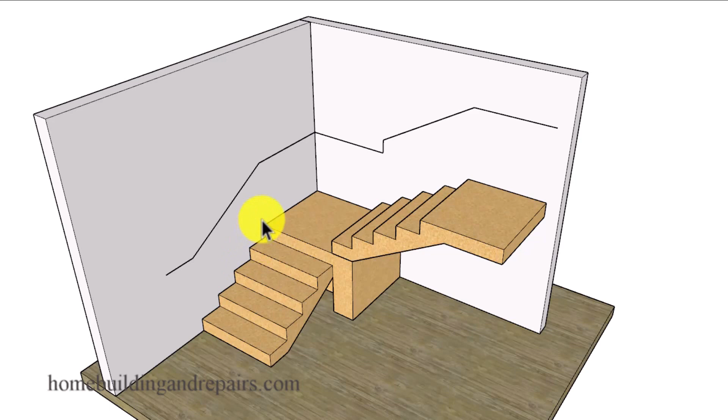In this video, I will show you how you can use tape to lay out the lines for your grippable hand railing. And you might not need it for a situation like this or a situation like this up here, but you might need it when you get to an area like this that you might not be familiar with.

And I actually got the idea from someone who suggested that you can use a string for this. So if that will work, then try that also. And I think the best way to go about it would be to cut a board at the desired length you're looking for, either the bottom or the top of your hand railing. And then get the board in the plumb position so that you can figure out where to place the tape.

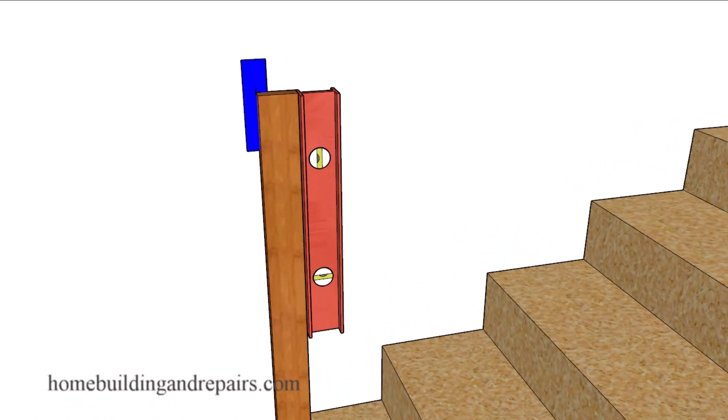And of course, the reason why you're using the tape is so that you don't put any pencil marks on the walls. And you can put as much tape as you feel like you need on the walls. If 2 or 3 pieces is going to work better than something like this, then go for it. Just make sure that you are using painter's tape, something that is not going to peel the paint and your texture off of the walls when you go to remove it.

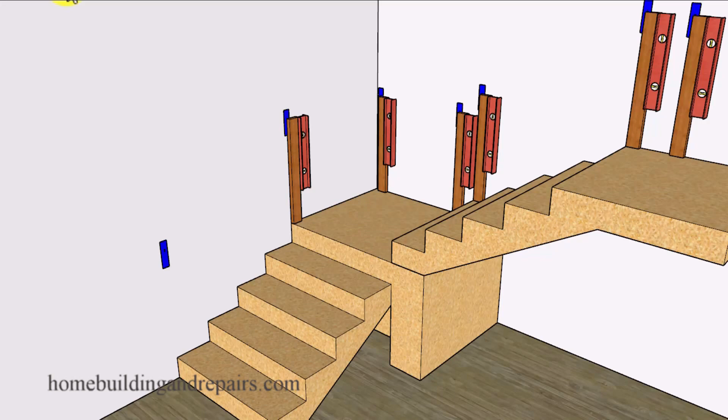And since the key positioning points are going to be from the front of the steps or the corner of your landings to create a continuous handrail, then you're simply going to position them something like this. So again, here we have the front of the step. We're plumbing our board to create a vertical line and positioning the tape where we need it so that we can basically connect the dots to create our handrail layout lines.

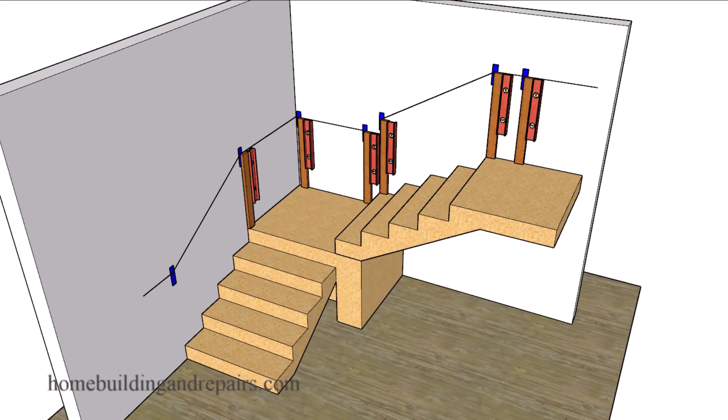But I'm going to go ahead and remove these layout lines because this isn't what we're going to have. We're going to have something that looks like this. Then we're going to create our layout lines by simply connecting the dots with more tape. And that's the beauty of this. If you don't like the design, you can simply reposition the tape.

And if the line you laid out was for the top of the handrail and you needed the line for the bottom of the handrail, then you could simply lower the lines and reposition the tape for that also. And again, the complicated areas, something like this that might be a little confusing for you. Or you might want to put a curve here instead of having it miter in at a corner.

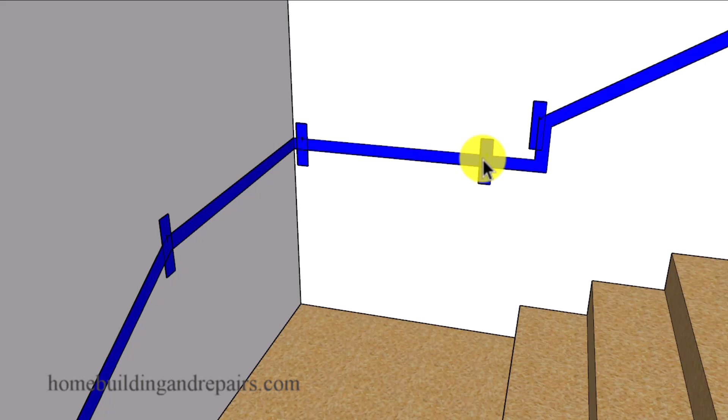Or you might need to move this a little further forward or a little further backwards, or you might need to extend this a little further down. And for a situation like this, you could just simply run this tape all the way down and then do some measuring to see if that would work. Instead of having a 90-degree angle here, you might be able to run the hand railing and connect it with a miter joint here.

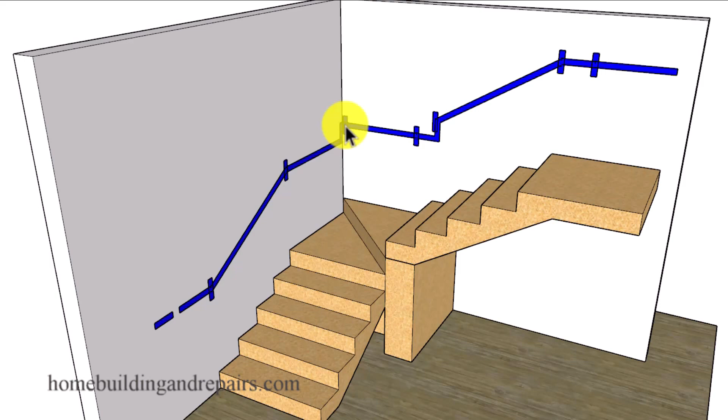And of course, if we have a winder set of stairs or a curved set of stairs, for example, if we add a step to the landing, then we're going to create another situation for the handrail that we might not be familiar with. And that's where using the tape really comes in handy. It provides you with a visual idea of what the handrail should look like, and in some cases will provide you with an excellent way to locate all of the hand railing hardware that you're going to use to attach the handrail to the wall framing.